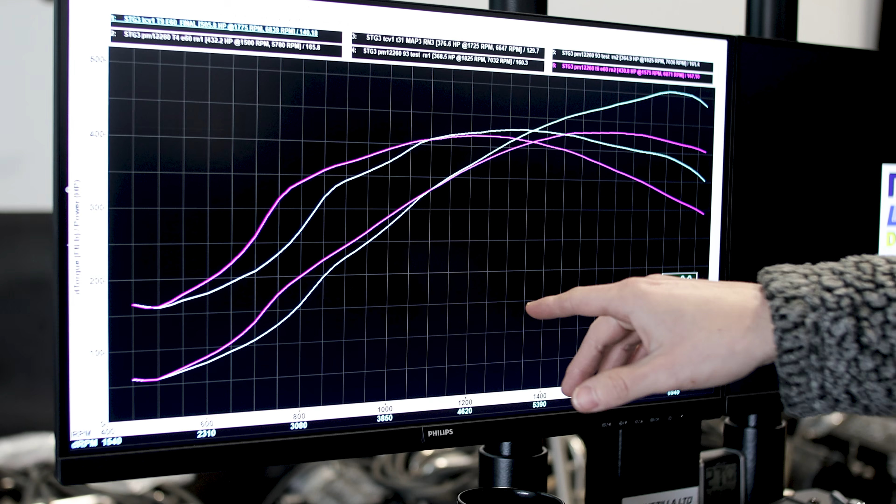The purple lines is the 2260. This is obviously torque, this is horsepower. Blue lines is the Turbo Concepts. Lose a bit in response, but you gain up here.

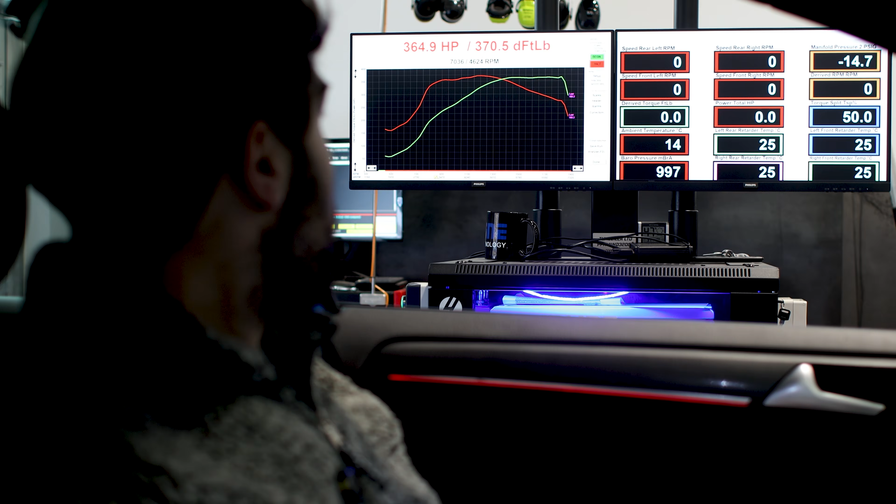It's a pretty good looking graph, huh? That's a very nice graph. Not as high as the Turbo Concepts one. Yeah, it's like 10 horsepower different up top. Actually, it's quite funny because if you overlay them, they're very, very similar. But the 2260 does spool faster.

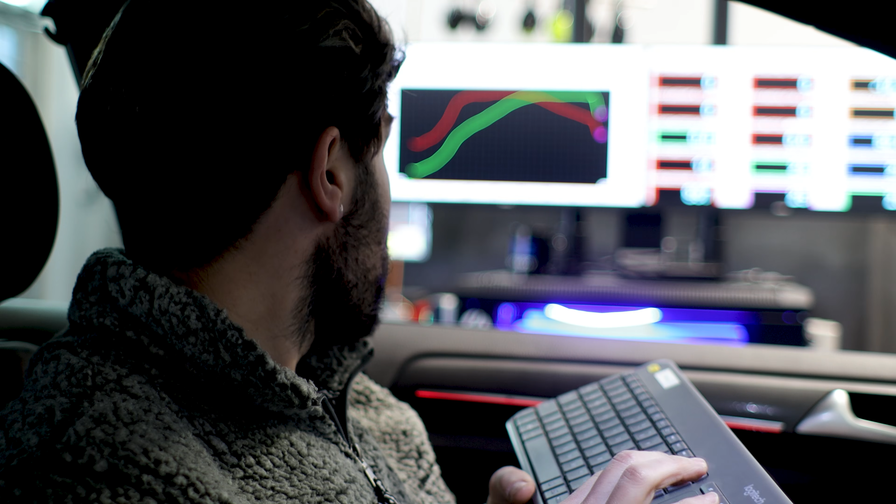You're looking at around 3100, 3200 RPM for the 2260, and the Turbo Concepts is around 35, 36. But there's a caveat to that. For people that run pump gas like 91, 93, the 2260 is probably the better choice.

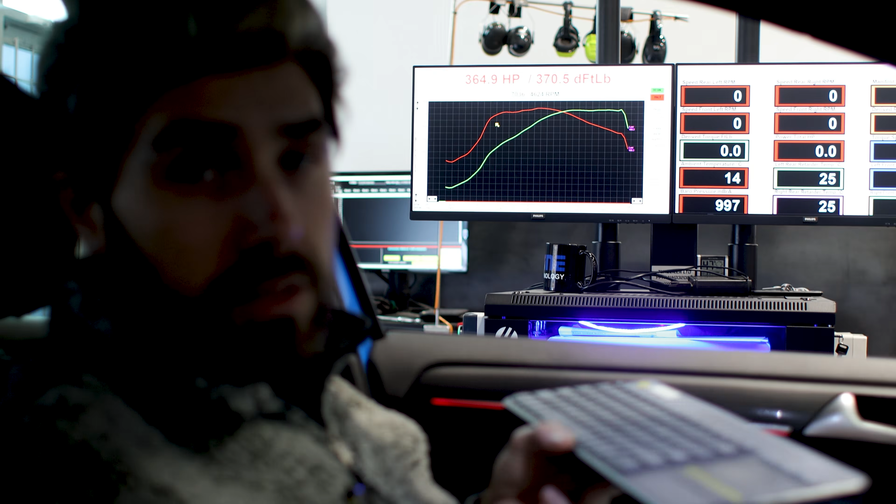Because Garrett like you to keep the turbine or the turbo speed under a limit, whereas the Turbo Concepts, as Nick usually says, have at it. You can't break it, and we've tried and we haven't. So there's a lot more potential with the Turbo Concepts. So for anyone that's on pump gas, it's a good choice because you get a little bit more response.

But if you're looking for more power and you're using ethanol, then you'd probably want the Turbo Concepts, because I think I said in the other video, this turbo is going to probably max out around 430, 440, and we're right on track, because we know when we put E85 in it, around E60, we usually get 40 horsepower gain, sometimes a little more. So it might even be a little under. It might be like 430, 420.

Whereas Turbo Concepts will go all the way up to 500. So yeah, anyone that's on ethanol, Turbo Concepts is probably going to be the better choice, because you're going to make more power. It'll make 500 quite easily. We've had it up to 570 on the S3, but that's really pushing stuff.

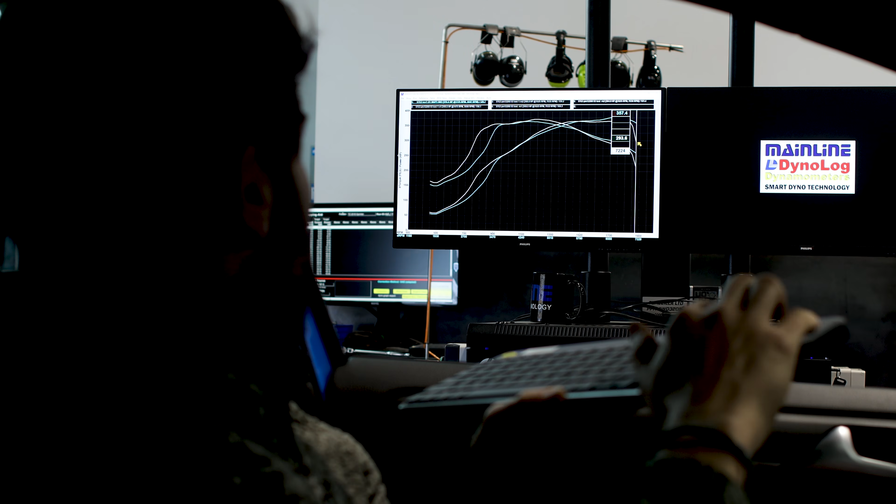So the white graph is the 2260 on pump 93. Blue graph is the Turbo Concepts on pump 93. So you can see they're very similar in the mid-range. Turbo Concepts makes a lot of power up top. And obviously the spool here is a pretty big chunk. So different turbo for different applications.

Now are you going to turn it up with ethanol? Yeah, put some ethanol in it, run it. We'll probably increase the boost by maybe half a pound to a pound as the content goes up. Pour in a bunch of timing and see where we end up.

So yeah, 420, 430 is my guess, which would be right in line for what the 1.8 did, Brian's car did, and someone else, but that seems to be where it's going to end up. Sweet. Which is what, 80 to 70 horsepower less.

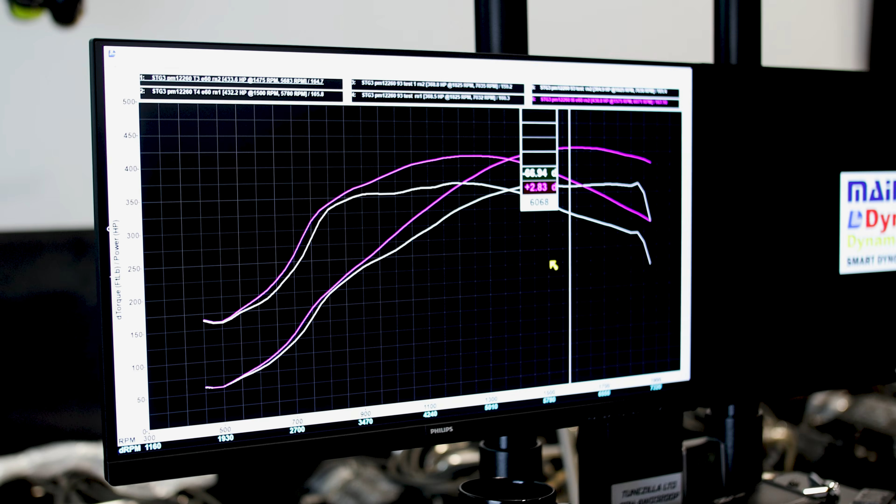And then I can show you the dyno graphs comparing pump gas, ethanol, and then we can do the comparison against the Turbo Concepts for pump gas and ethanol as well. Pretty good gain on ethanol. 68 horsepower difference. So really nice, and it carries out everywhere. On ethanol, we can get a little bit more aggressive with the timing and how much boost we make. So the response here is a little bit better.

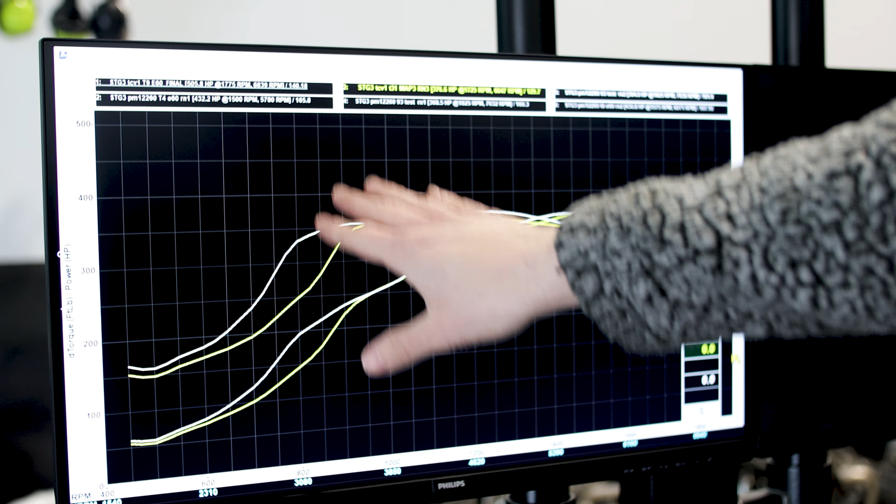And then I'll bring up the Turbo Concepts because that's what everyone's probably going to be asking. So this is the 2260 versus the Turbo Concepts on pump 93. As you can see, aside from the spool, they pretty much overlay. Turbo Concepts kind of has a little bit more power up top. There's a little bit in the mid-range here, but it varies from day-to-day conditions. Oh wow, that's a huge difference, 10 horsepower.

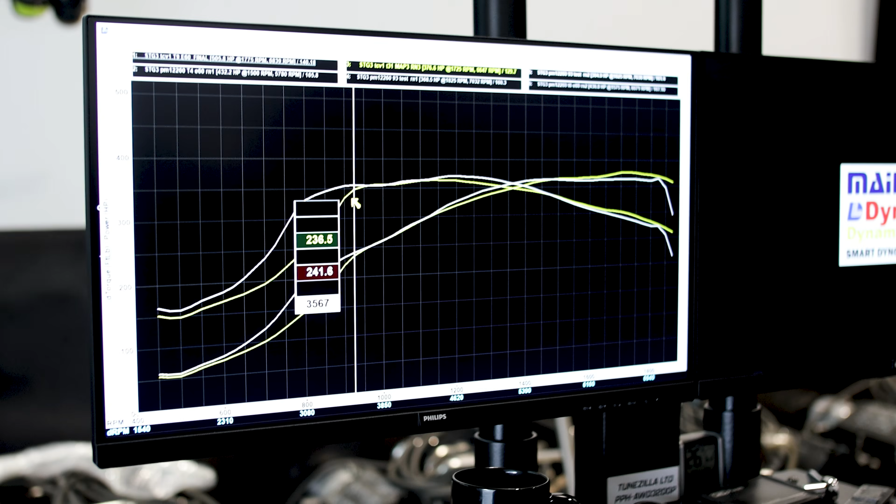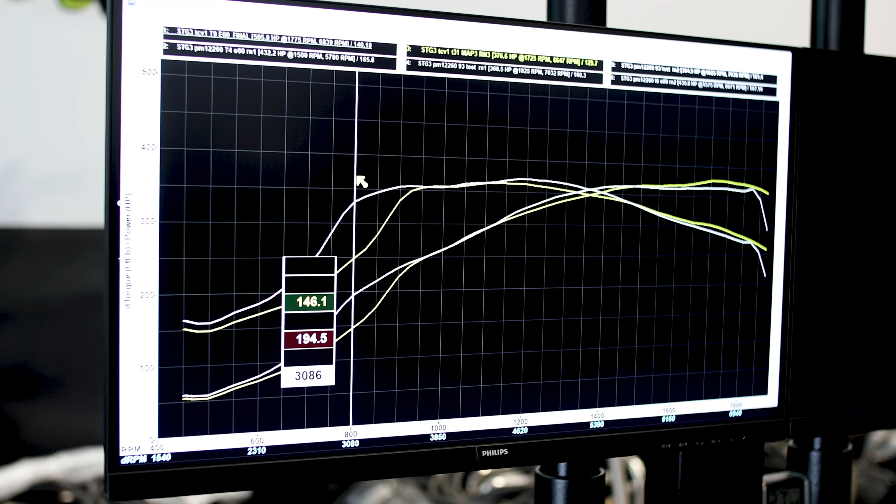Yep, but here is the real story, I guess. The Turbo Concepts is like 3600, 3550, comes up real strong, like peak torque. And then the 2260, it's a little bit more gradual, but you're kind of getting into the meat of it around 3200. Yeah, a little bit more responsive, maybe better for a daily driver if you're only running pump gas. And then let's do the comparison for ethanol, and that's where things really change.

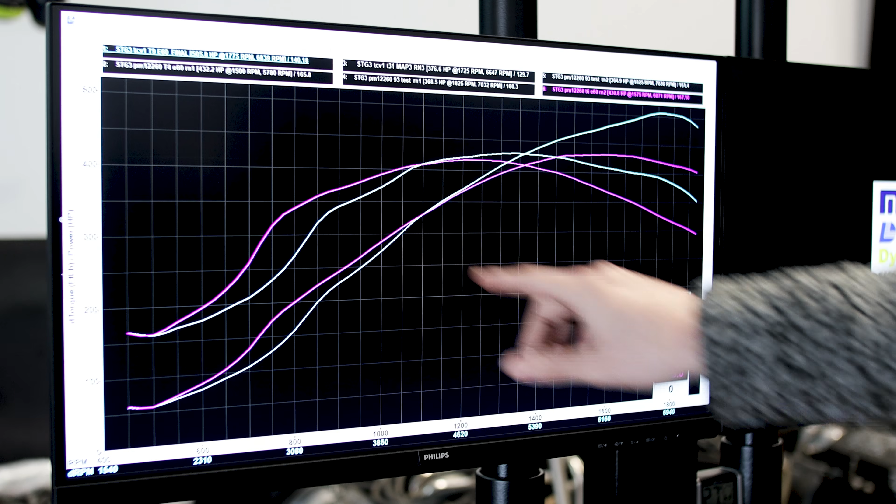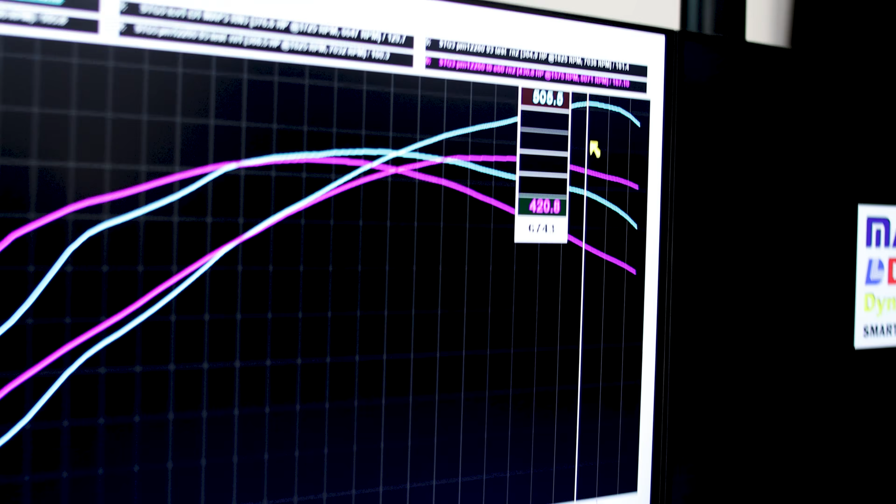The purple lines is the 2260. This is obviously torque, this is horsepower. Blue lines is the Turbo Concepts. Again, you lose a bit in response, but you gain up here 80 horsepower, 85 horsepower. And it can do more. We're purposely keeping it at 500.

Hopefully that will answer some questions that we've seen people asking in the social media. Everyone says they're going to switch over when we release this tune, so now I'll go do it.